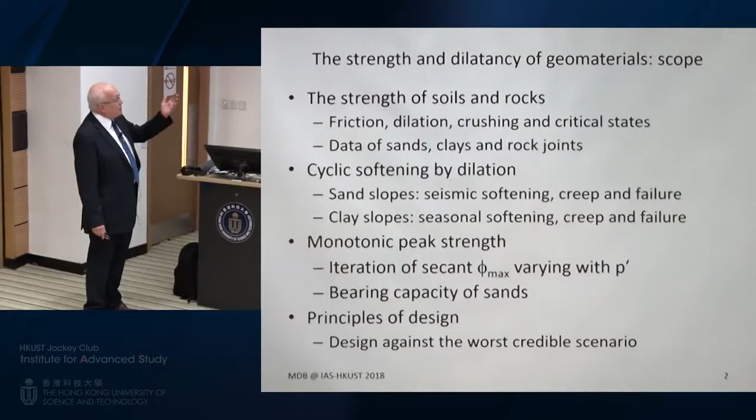I'm going to remind you that the typical code approach of defining an ultimate limit state as a once-only event has its flaws, and that's the bullet point on cyclic softening by dilation. I've only got an hour and a bit, so I haven't got time to show you anything on clay slopes, but you can ask me about that at the end if you wish.

I'm going to emphasize some points on decision-making with respect to classes of problems that either are vulnerable to cyclic softening or not. And then I've got some policy issues at the end that I've called principles of design. So that's where we're going.

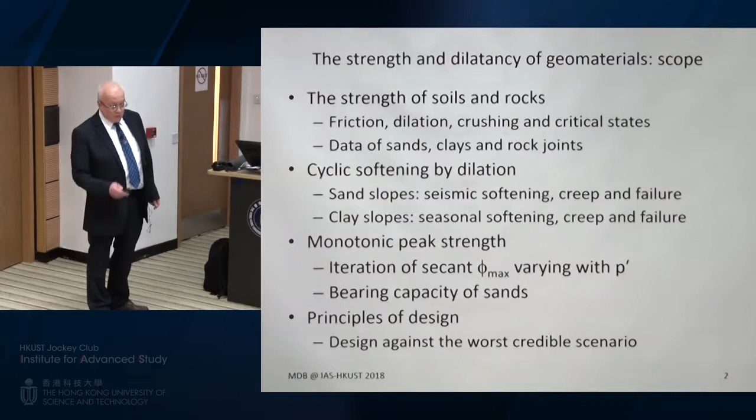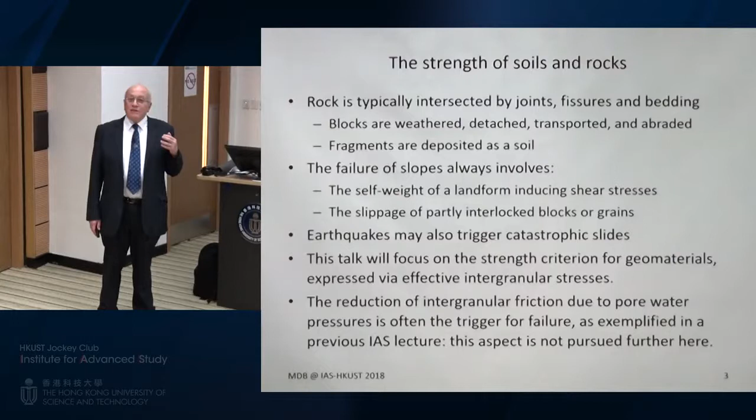IAS lectures used to invite people from any field, but as I look round the room I feel I probably know almost everybody. Are there any fugitive physicists or mechanical engineers, chemical engineers? No. I put this slide in case there were, because when I gave my first IAS lecture, there were only a sprinkling of civil engineers, and a lot of multicultural mechanical engineers trying to learn something.

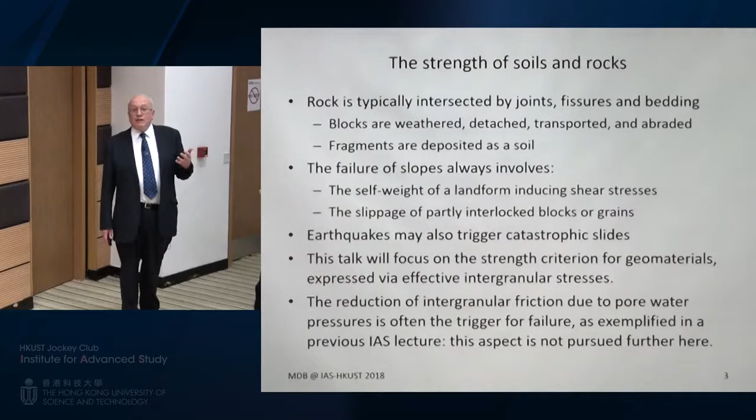So you know where soil comes from, and it's all to do with slippage either of grains or blocks, for example the failure of slopes under dead weight. In addition you've got earthquakes, and certainly pore pressures, which I'm not going to spend any time talking about. This isn't a lecture specifically on slopes, otherwise I don't think I'd get away with not mentioning the hydrogeology, the water flow that kills slopes almost without exception.

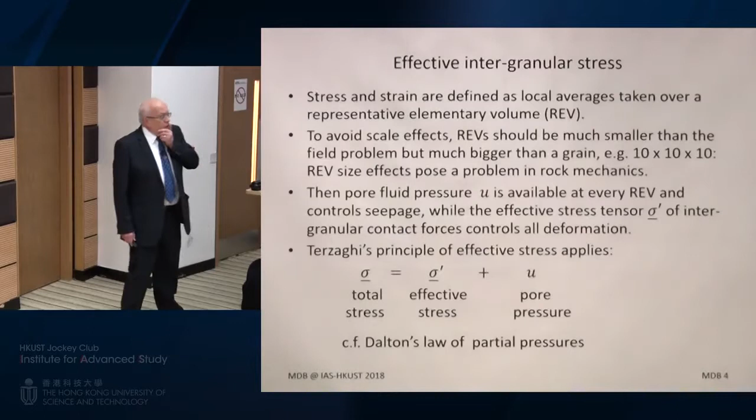So most of what you're going to get is the bullet point that warns you about it. You guys also know about effective stress.

I point out right at the top there that soil isn't a continuum. You need a representative elementary volume. I always think that if you were doing sugar mechanics, you shouldn't be thinking about a single grain of sugar. You should be thinking about an agglomeration of crystals about the size of a sugar cube, maybe 10 by 10 by 10, 1,000 grains. That might be statistically representative, that you've got enough patterns of contacts between the grains to capture the essential behavior.

In soil mechanics, we assume that's not a problem, that we can imagine a point being a sand cube, like a sugar cube, and even the sugar cube is much smaller than the boundary value problem we're trying to get an insight on. So we don't have to think very hard about it.

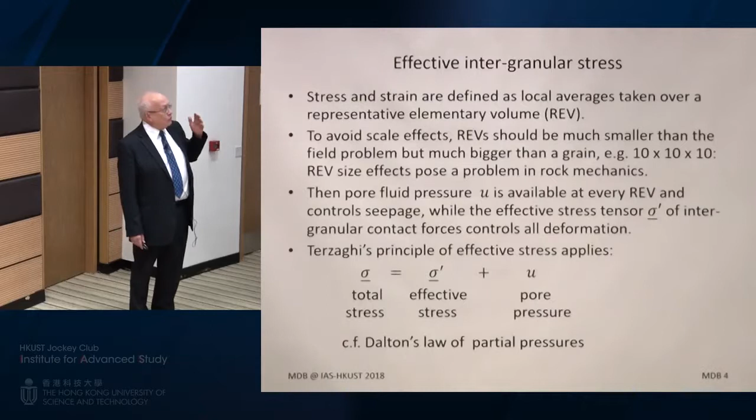They have to think in rock mechanics much more carefully about the meaning of stress and the magnitude of stress, because they're the wrong side of the REV argument. It's by no means clear what the scale effects are. And if anyone's interested in that, you can ask me a question on that at the end, because I'm not going to say any more about it otherwise, I don't think.

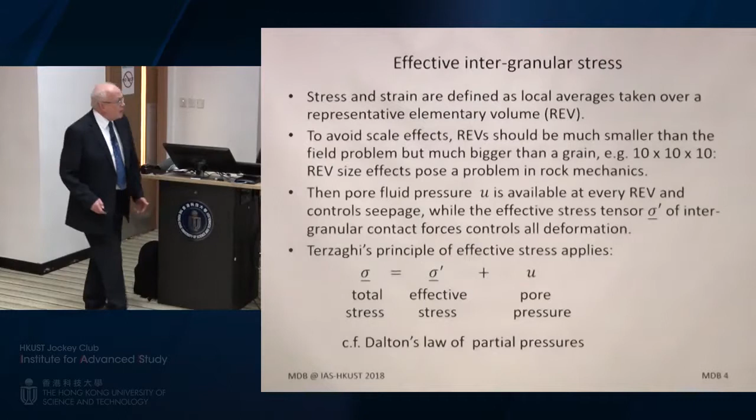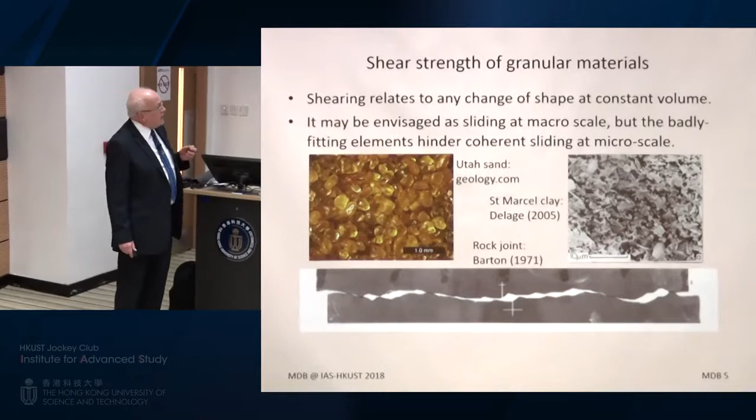And then rock joints, of course, this is taken out of one of Nick Barton's papers at the bottom. This is again a little bit interlocked. And this is the context of most of the lecture, the interlocking between grains and blocks.

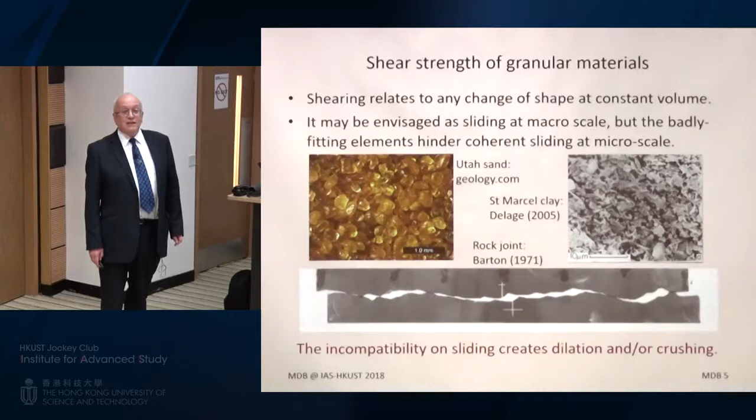So what you've got is that shear can't take place on any internal surface without creating a disturbance in the fabric, which in some instances would cause dilation, change of volume of the whole sample at its boundaries, and in other cases would just cause sort of juddering, statistically. Or crushing, which was a feature of that 1986 paper and is going to be a feature of the next slides as well.

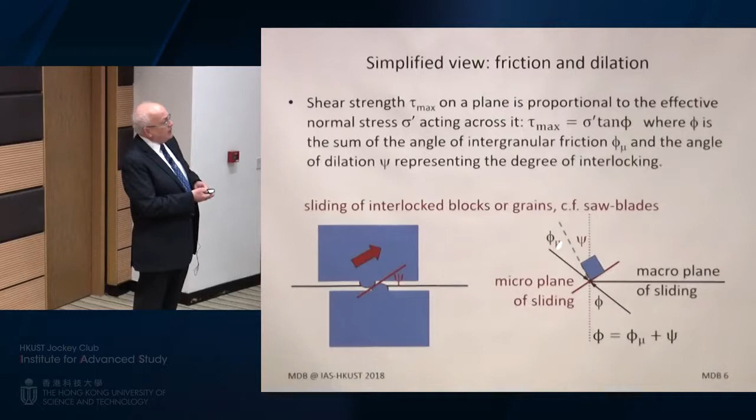This is either showing or reminding you that the interlock here with its angle psi throws out the normal to the actual plane of sliding by being psi from the vertical here, just as it was psi from the horizontal on the macro plane of sliding. And then in addition, the actual force resultant would be at an angle phi mu to that, to explain that it can slide on that red micro plane.

And then Coulomb, standing back and looking at the inclination of the force through the macro plane of sliding, would call that the angle of friction.

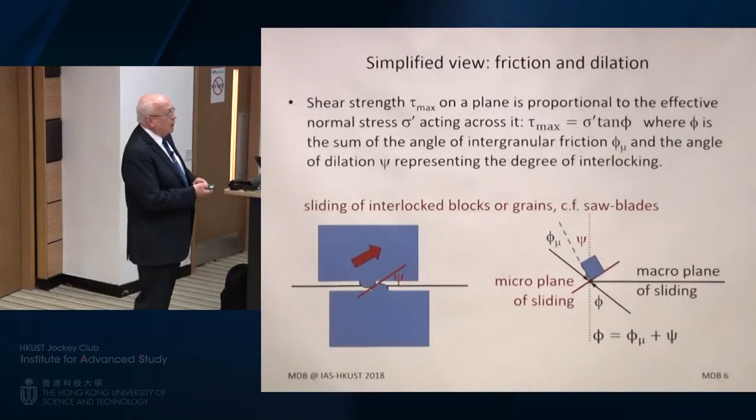Only if we get to realize that it's not really friction, that this is geometrical, it's dilation, would we hesitate to call that anymore the angle of friction. Otherwise you would be saying friction equals friction plus dilation, which might linguistically seem a bit challenging. So angle of shearing resistance would be a better thing to call it.

And that's a sort of secant phi value, if the interlocks don't crush.

Rowe had a lot of trouble with phi mu and phi crit in his own stress-dilatancy theory. And if he'd known what the latest research - and I have no reason to second-guess Senetakis, Matthew Coop, Todisco, Soils and Foundations - showing that phi mu is probably of the order of 10 degrees between smooth pieces of quartz. So when sand actually slides on sand, 10 degrees. So anything bigger than that, you need to explain what's going on.

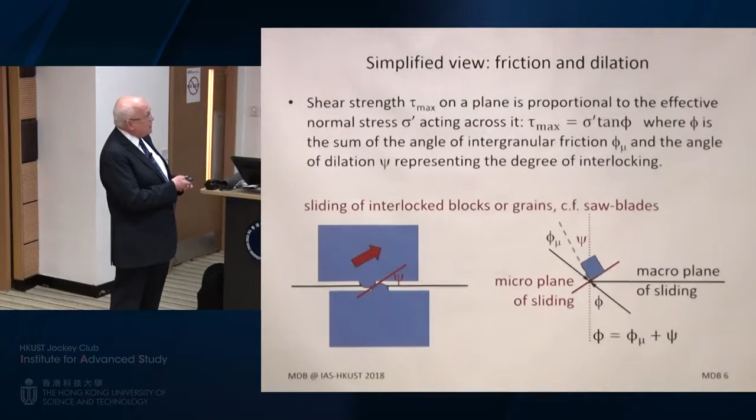And so what's particularly demanding is consider phi crit. Let me look back for you at the definition of phi mu. That was a single crystal or a single element sliding against another element.

Now, phi crit is the angle of friction you measure, for example, in a direct shear apparatus, when an upper box of sand grains slides over a lower box. So in this case, statistically, the grains are going up and down. And it's a much larger number.

So even when dilatancy is zero, you've got this critical state phi that might be 32 degrees for smooth quartz sand, rounded grains of a given size. It would be higher if there was a dispersion of sand sizes, but they were still sort of smooth, sub-rounded, but much larger if you had dispersed sizes and angular fragments.

And that's just the critical state bit. 40, 36, 32 plus 10. And that's why Kenichi didn't like the earlier slide. I mean, he can come back at me at the end, because there's obviously something else going on. I'm not talking about dilatancy here, I'm talking about the critical state angle.

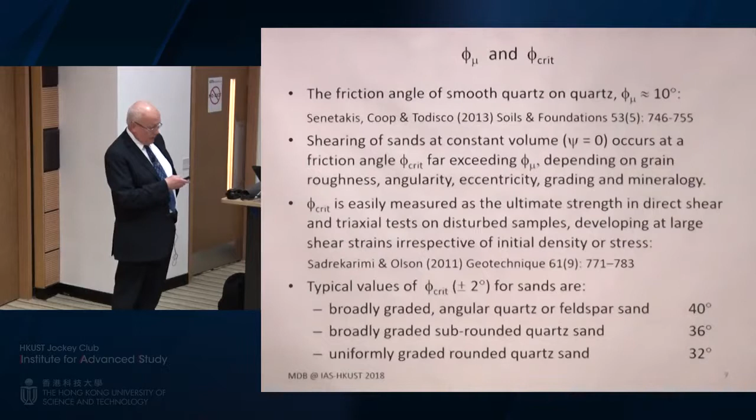So, can we get anywhere on what is the physical basis of phi crit? And if we can, does it matter? So I'm restating the problem.

Everyone finds that they've got to write phi equals phi crit plus psi. So if there's no dilation, the box of sand isn't changing in volume when you shear it, and that's the definition of a critical state. So you feel impelled to write critical state phi. And it's those bigger angles that I was talking about. So what's the explanation for such a big angle if quartz has this small angle of friction?

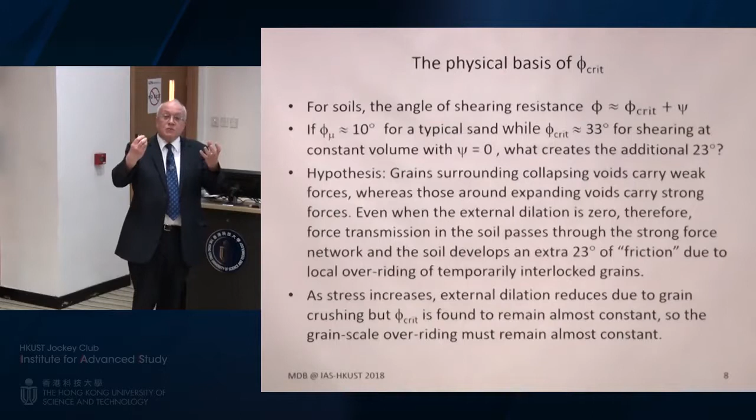So it's hard to summarize, but I've tried in one bullet point, because it's all the space I've got. Maybe it's the statistical nature of the contacts and the way they're organized. So what I chose to put here is that grains surrounding collapsing voids, you're at a critical state. Some voids will be getting bigger, some will be getting smaller. Some contacts are sort of collapsing, some are jamming and are persistent.

And the thought is that the ones that are jamming and persistent carry large forces, and the ones that are collapsing don't carry any forces at all. So it's very undemocratic. So even though volume is constant, the soil behaves mechanically as though it's sort of internally dilating, even though you can't see anything at the boundaries. That's what I've chosen to say.

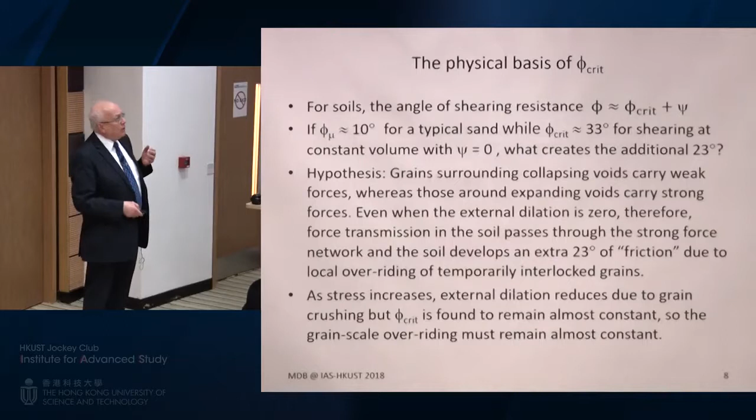It's not quite enough. It's still a sort of active research topic with people doing micromechanics, looking at contact force distributions. And so it's a sort of jamming, even in soil at a critical state, which explains the extra friction that caused such a lot of trouble to Peter Rowe in the 1950s and 1960s.

And the next part of the story is, as stress increases, even if you had some external dilation, that then reduces due to crushing. That was the proposition I put in that 1986 paper. And there's a lot more evidence now in favour of it. And so I need to say something about crushing.

This is the standard undergraduate lecture slide on phi against shear deformation. As you mobilize some shear, expressed as a stress ratio written as an angle of shearing resistance in degrees, you may find dense soil is like the green line that reaches a peak secant phi value and then drops off, whereas loose soil would painfully climb with a lot of shear strain to the same phi value. Phi crit is a material property.

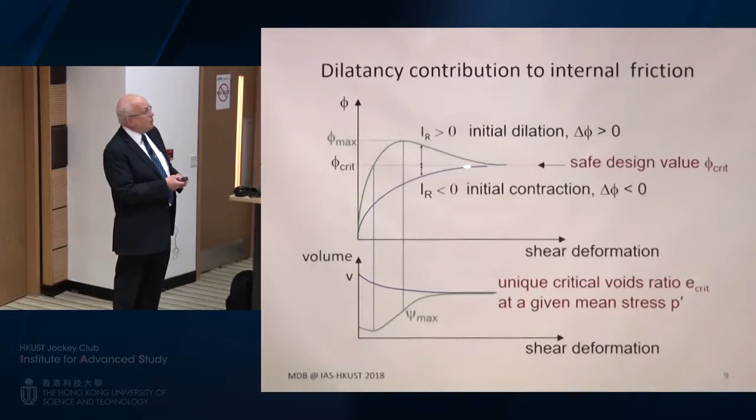So, strength and dilatancy of sands. I'm going to go through this a little more quickly. This is from my 1986 paper, data of 17 sands - it was all I could find at the time. I thought when I retired I would have a lot more time to look back at the 2,500 citations this paper has got and collect together all the other sand data people have generated since 1986, but I haven't had time to do that.

As far as I know, people are saying it's a good basis for understanding all sands, or silts, as long as they're inorganic. Looking at the influence of dilation on peak strength, and variability of dilation with effective stress, the influence of relative density and grain crushing on dilatancy becomes important. The critical state line, which was an aspect I didn't emphasize in the 1986 paper but can now, so I will, and the non-linear envelope of peak strength, therefore dispensing with the Mohr-Coulomb equation in its linear form. That's where we're going.

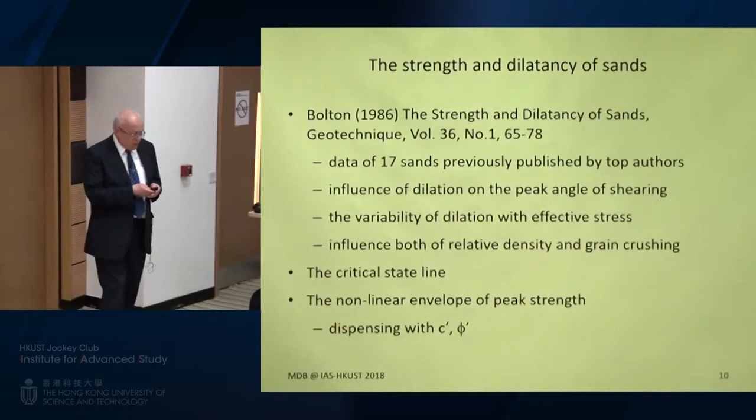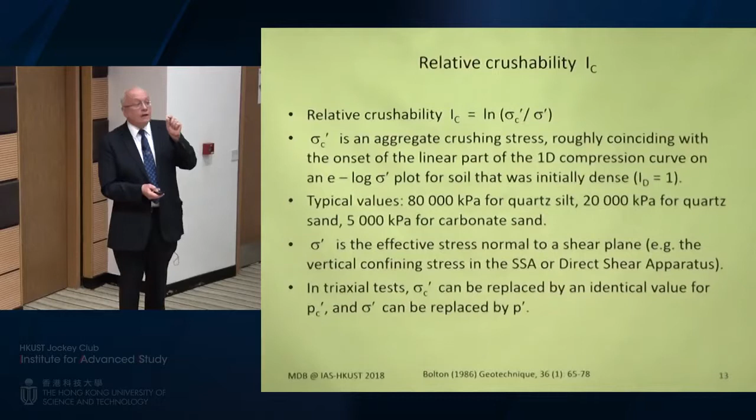Large grains are weaker in proportion than small grains. We know this with regard to rods and fibres because glass fibres and carbon fibres are much stronger because the flaws in them that would give rise to brittle fracture are obviously much smaller, and so their brittle strength is greater. And so for quartz silt, as you'll see later, a much bigger value, 80 megapascals, turns out to be appropriate.

And much less for broken shell fragments. And so this is my apologia about using sigma dash as the vertical effective stress in a shear box, and sigma dash C similarly as the parameter that goes with it, which is the crushing stress.

And so the relative dilatancy index, and this was me pulling together a database and trying to find any common sense in it. You have to have the density index and the stress index multiplied together and then maybe a minus 1. That's what I plumped for.

And then I discovered that dilatancy and the brittle strength component, phi max minus phi crit, everything was proportional to IR defined in this way.

So if the relative dilatancy index was negative, it indicated a tendency to compact, so that shearing caused the density to increase, and you end up ultimately at a critical state. And if IR is positive, that indicated dilation, so it softens and ultimately reaches the same critical state. And IR equals 0 implies you're at a critical state.

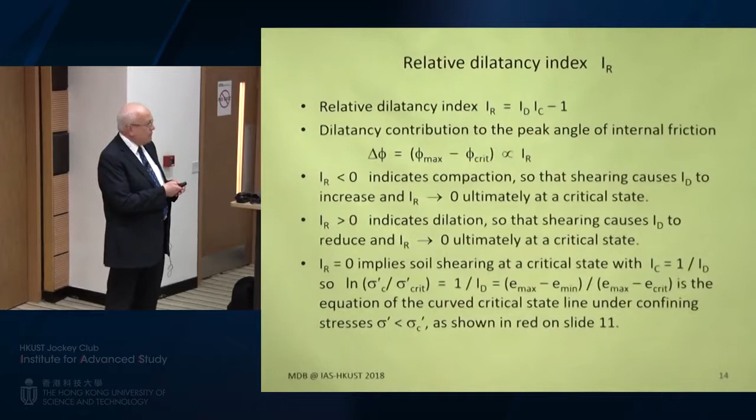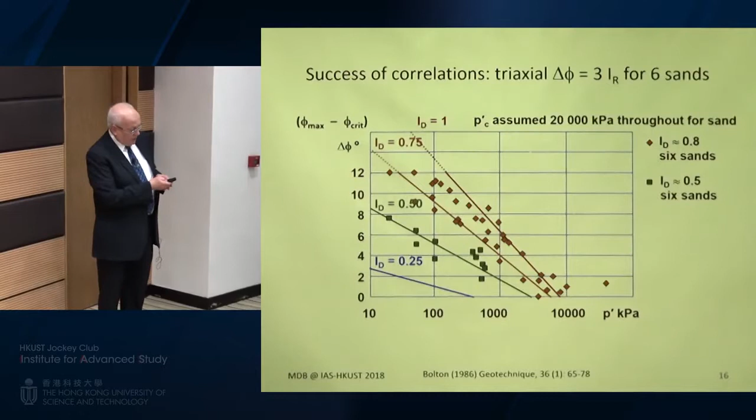That's well known to all of you. The data of the sands fitted, so 6 sands in the literature with a relative density of 80%, fitted between these lines, which are the correlations I've just shown you. This is a plot of the dilatancy contribution, delta phi, phi max minus phi crit, against log p dashed. If you look back at the basic equation, these are straight lines. These are the predictions, the data for 50% and 80% within a couple of degrees. So that's okay, or seemed okay.

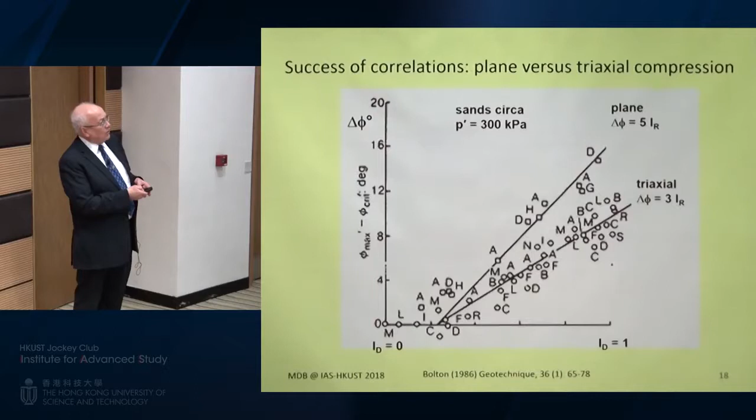This was Berlin sand, where there was data of various mean effective stresses. These were nice constant P' tests, so you could actually plot a decent diagram. This is delta phi, the dilatant bit, against relative density. These straight lines are the simple correlations, and the data obligingly fitted within a degree, actually, in that case, I think.

So where are we with soil mechanics? What does this show us? If somebody comes along in a consultancy office and says, I've found a single shear box test on this material, and there is its plot on tau sigma dashed axes, what can I say? Probably the critical state line wouldn't be here. Phi crit is so incredibly cheap and easy to find, and so that's part of the message, that we ought to do that on any granular material.

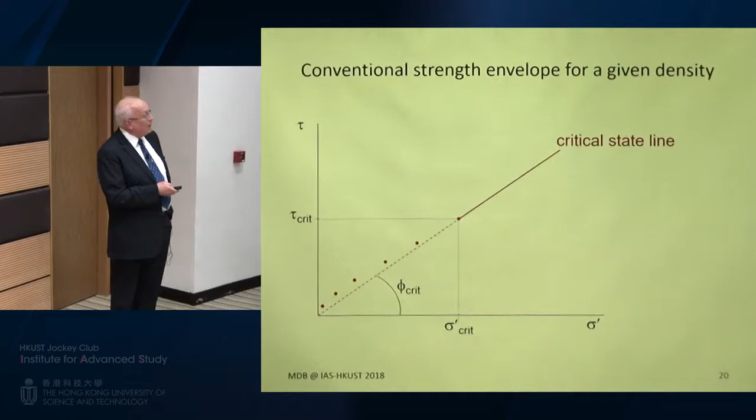Suppose they overindulge themselves and do many tests. I remember what I wanted to point out. Of course, what's going on is that as the stress reduces, there is more dilatancy, but not as much as a linear envelope would suggest.

And anyone who's played around with this knows that in slope stability problems, a little bit of true cohesion transforms the safety situation out of all recognition. It's also true in shallow foundations, by the way. So it may look on this diagram as though there isn't a huge issue, but that can have the most significant consequences.

So that's the sort of thing that goes on at the moment. And then, of course, at high stresses, any given line would fall below the critical state line and give you an underestimate. I think that is a fair statement of the conventional state of affairs.

So C' is the true cohesion intercept. It is a silly name because we know dry sand is cohesionless, and indeed it is true, at the origin there is no intercept. And there's a better characterization, which is the one I've just given you.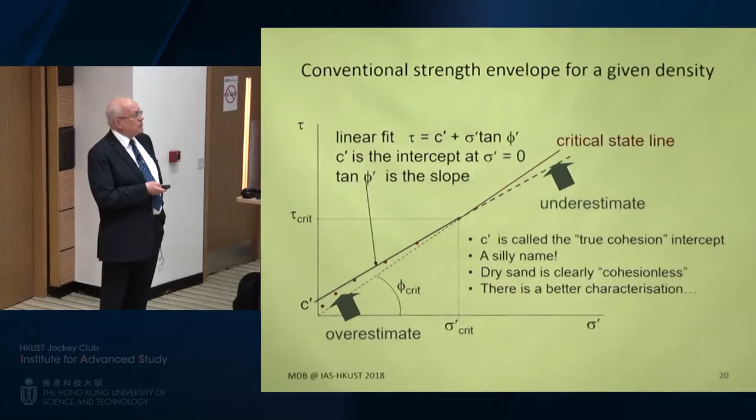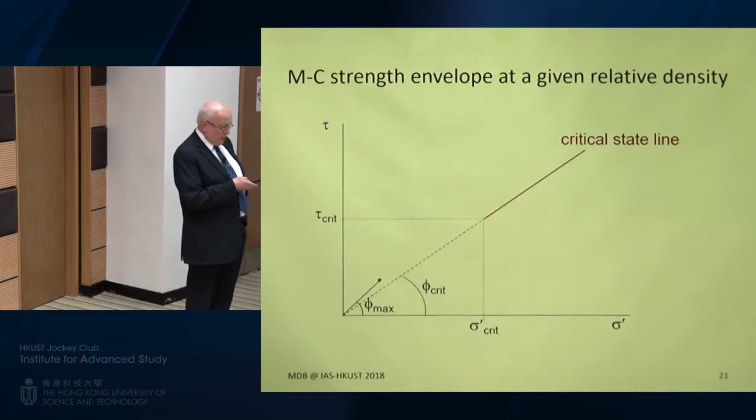So start again. This is a new world that we've woken up to, in which people do measure the critical state angle of friction, because it is the cheapest thing you can possibly measure. So they know that, and then the graduate comes along and says, I've got this one test other than the critical state, what can I tell from that? Well, what it's given you is phi max. So what can you tell from that? Well, a lot, because you substitute phi max and phi crit into our equation.

If you believe Bolton 1986 and you know you're testing a quartz sand, you might trust your luck that you know sigma dash C is 20 megapascals. You shouldn't trust Bolton 86 in that respect, of course, you should do more tests and determine it. But if that was 20 megapascals, you could have predicted what phi max was. But now you know phi max, and if you know phi crit, you don't have to trust Bolton 1986, because this is an equation that tells you what the local estimate of sigma dash C is. I'm assuming you know what density you did the test at. So you get immediately one estimate of sigma dash C. Is it anything like 20 megapascals?

And so you gain confidence. Perhaps it is 20 megapascals, and you think, oh, that's rather good. I can predict now the other nearby strengths, using the same equation to predict strength at higher or lower stresses. Because you've measured the critical state angle, you know that if you go beyond here, you don't fall below that point. You just have to do a lot of strain hardening to get to it. So very early on you gain a lot of confidence, fundamental confidence in the mechanics of what's going on in the soil.

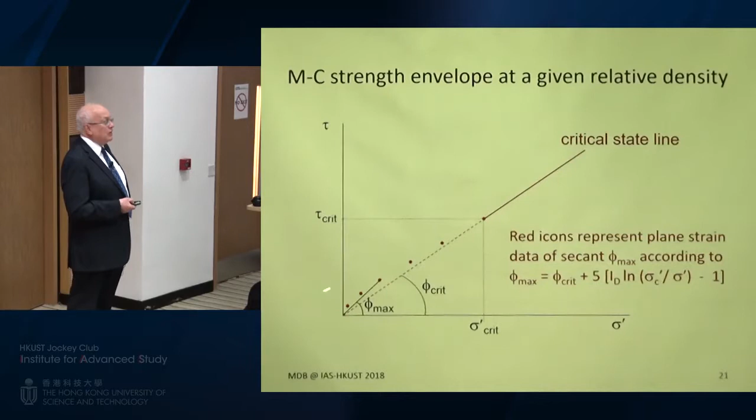Having plotted either your data or using my correlation in the database, you might think that was a bit of a rigmarole going through the secant phi thing. Perhaps I'd like to just fit a curve to that peak strength data. Let me remind you, this comes from real data from highly respected sources. It cuts out below about 30 kPa because people often don't do tests there, so we don't usually have data. I've rarely seen anything below 30 kilopascals. But with that caveat, using this equation, creating the data points and then curve fitting, the data fits a power curve.

So tau max over tau crit equals sigma dashed over sigma dash crit to some power beta, which is quite close to being 1 minus 0.14 times the relative density in plane strain. That's sort of interesting - maybe we shouldn't have been plotting tau against sigma and having linear Mohr-Coulomb envelopes. Maybe we should have been plotting log tau against log sigma and then getting linear envelopes, which is what you get from a power curve.

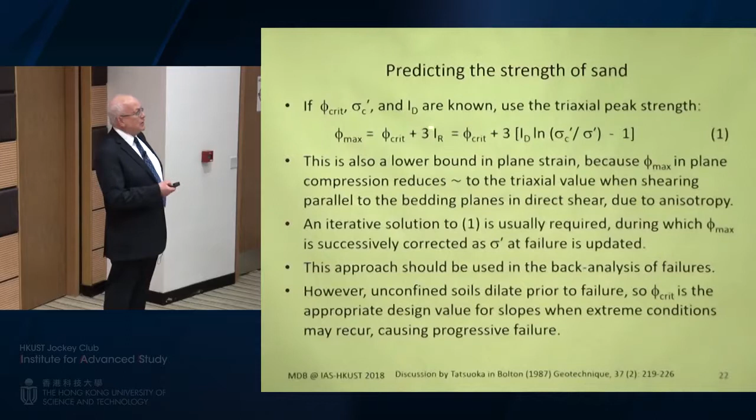So that's how you should back analyze failures. Try and find the density of the soil as it is, come up with a solution to the boundary value problem that you're worrying about that's happened, iterate on stress, get the right phi value, and then you should be able to understand what's happened.

However, as I will show you in a moment, unconfined soils dilate prior to shear, prior to failure. Before you get to peak strength, they've started dilating. And if you keep revisiting that prior to failure point, they'll keep dilating, causing progressive failure. And that's important.

Clays. How am I doing? Oh, frightening. 5:57. Got nowhere.

Clays consist not so much of platelets, but of booklets or chains of particles interlocked in the way I've described. Clay mud is compressed, and these things break, crush effectively, delaminate and break up.

And so clay quickly finds its normal or plastic or clastic compression line, whereas at sand we had to go all the way to 20 megapascals. If we let the clay off and reduce the stress by the yield stress ratio, or more usually the over-consolidation ratio, then on that unloading, reloading cycle, it's quasi-elastic.

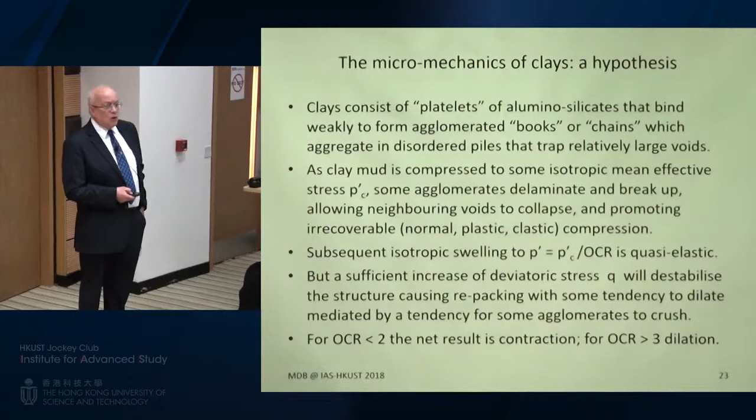And as OCR increases to a large number, you're further and further away from the agglomerate of particles initially crushing. So you've got to push it further before it breaks. And as we all know, for small overconsolidation ratios less than 2, the net result is contraction. For overconsolidation ratios greater than 3, it's dilation. So there are these two opposing tendencies: destabilization and repacking at small OCRs, and the tendency to dilate at high OCRs.

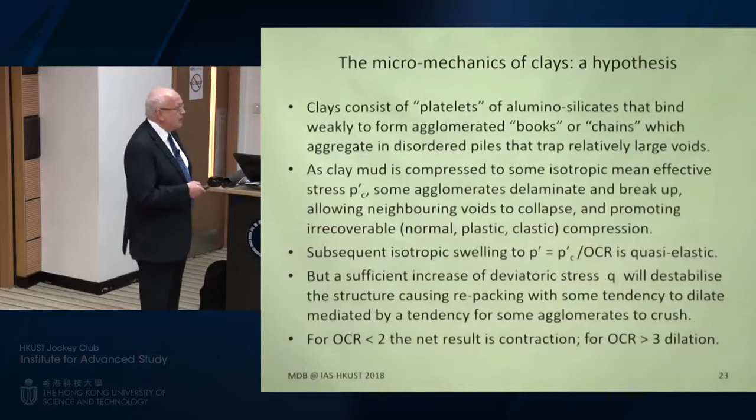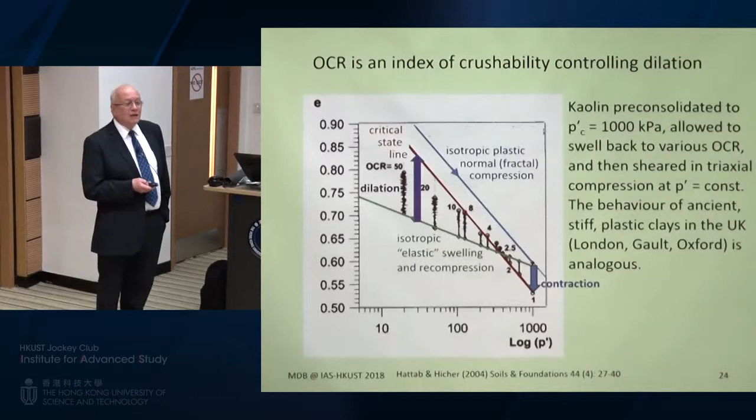And that's sort of hypothetical. You can't see what clay is doing. You can see sand breaking and damaging, but we haven't got the killer experiment yet that shows blocks, groups of clay particles breaking up at different stress levels and dilating. It'd be a nice thing to see.

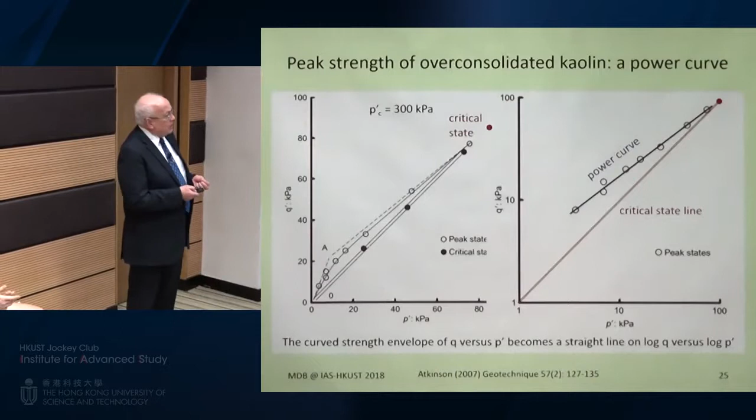This is clays. So this is the peak strength, and if you push it over the peak, it softens down onto the critical state line. I think that's all I had time for on clays. Well, I sort of summarized.

Okay, so Atkinson 2007 normalized against P dash at the critical state at each new voids ratio. Well, that's a little bit clunky for what I wanted to do, so I renormalized it against P dash crit on the same elastic unloading line. And then I get very much the same equation that I showed you with the sand, and so I gave that an index beta as well.

And in this case, there really was some variation from clay to clay. Because in the sand, you had no idea what the probability of fracture of the different grains was—they'd never been to such high stress before. In the clays, everything's been taken up to a high stress because we're dealing with over-consolidation ratio. So it's actually a different stress history condition than was the case in testing sands.

We don't often think of testing sands through an over-consolidation cycle. I think we probably should, but we don't. And so it shouldn't be a surprise that the propensity of different clays to damage in different respects, and therefore give you peak strength curves, power curves with different exponents, might well be perfectly sensible.

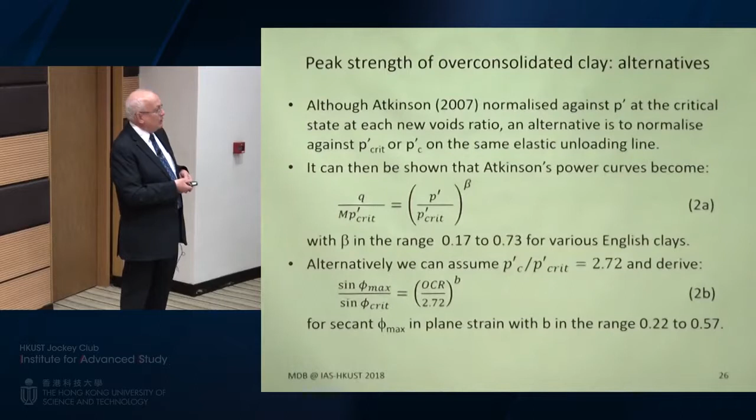So depending on the geometry of the fabric of the clay, the particular clay, you would expect different beta values. And I found that you could also express it in terms of a ratio of sine phi max over sine phi crit. So there are these other expressions, any of which you can rely on, but sands and clays being really very similar in the data, and hypothetically at least, very similar in the reason for the data being very similar.

Just a comment about ultimate strength of clays. Lupini, Skinner and Vaughan explained that you could get clays into a critical state if they were engaging in turbulent shear, and then you might have an angle of friction of typical clays of about 20, 21 degrees.

But as we know, sliding on a polished slip surface, which for some reason we speak Swedish when we talk about polished slip surfaces, call them slickensides, with residual friction phi res, and that's about half phi crit, maybe only of the order of 10 degrees, can be as small as 6 degrees. And it's tempting, isn't it, to call that phi mu. I mean, if you can see your face in a slickenside, then you're looking at a phi mu problem, smooth surfaces sliding against each other.

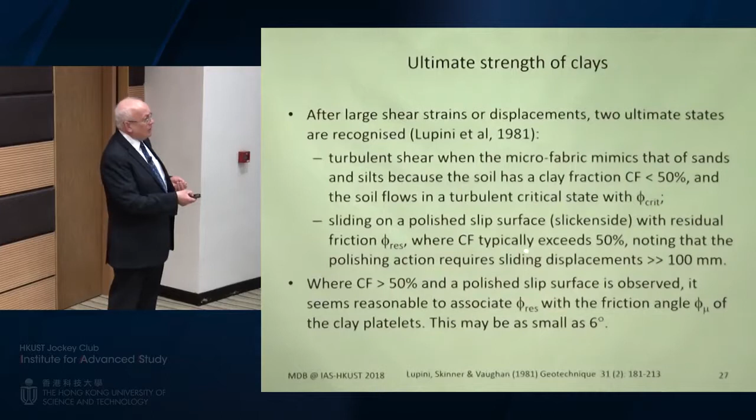So maybe the difference between phi crit and phi mu. It appeals to me anyway. Rocks. Better speed up.

Copying Nick Barton. Rocks are nearly always controlled by discontinuities, which are nearly always rough and interlocked.

Barton did exactly the same sort of thing that I did for sands. He talked about them being interlocked and the importance of waviness and roughness, and linking to dilation mediated by crushing. So he had exactly the same set of ideas.

And from the very earliest days, I know I've quoted his 2013 paper, but there's a 1985 paper and earlier papers than that, when he was talking about the complete uselessness of the Mohr-Coulomb strength envelope for rocks, for joints in rocks.

And so in 2013, he did that sketch where he wanted to say, in megapascals tau versus sigma dashed. Intact rock might be up here, and if you were very lucky with a sort of Hoek-Brown criterion, you might measure some intercept. It might give you a real tensile strength and a real shear strength at zero effective stress. But all other materials, he was talking about rocks, fractured rock, jointed rock, rock fill, non-linear strength envelopes.

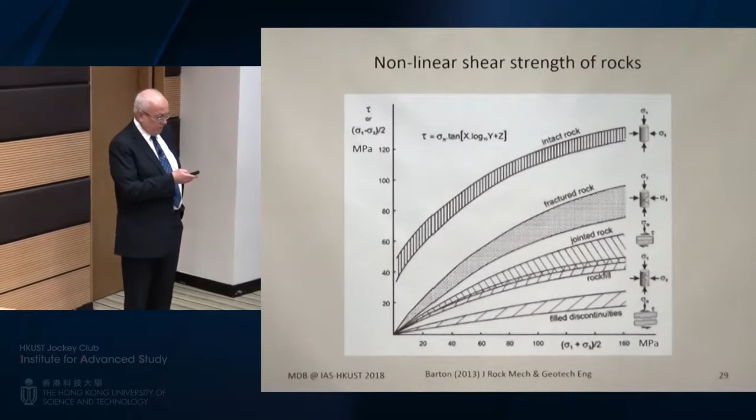And so that strain of work didn't begin with Rowe's stress-dilatancy. It began with Patton, but coming up with exactly the equation I began the sands lecture with, phi mu plus i. That's the notion of microplanes and macroplanes that I introduced. And phi mu is the material friction angle.

And then Barton came along in 1977 and said, no, it's not phi mu, it's phi crit. And you can find it by just testing the rock joints until you get a steady, sort of steady value, but there'll be a juddering. So it will have stopped dilating, but it's noisy.

And so he wrote phi r. Unfortunately, in each silo of thinking, even rock mechanics and soil mechanics people can't agree on using the same symbols for things. It's sort of a pity. So he calls it the residual friction angle. I was obviously calling it critical state angle.

And he immediately linked to an index comprising a joint roughness coefficient multiplied by the logarithm of the ratio initially between the unconfined compression strength of the asperities on the rock crack divided by the current normal effective stress. So that is effectively identical to what fitted sand.

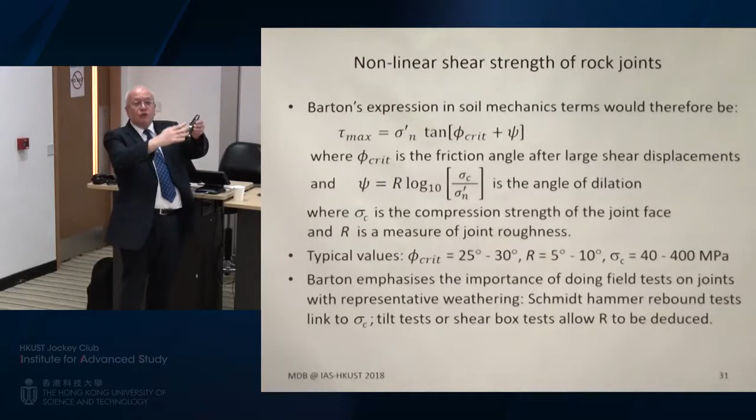And where Barton was particularly good was they emphasized the importance of doing field tests on joints. So you find a joint and you want to discover what all this is about, and he would get you doing little tests, sliding an upper and lower part of a rock joint over each other. So you tilt until it slides, and then you back analyze and find R, or you do a shear box type test and back analyze and find R. And you get the sigma C.

He emphasized the importance in rock mechanics terms of getting to know the sigma C value for the actual weathered asperities. In a broken piece of rock, you get water and oxygen available and it weathers over a period of time. And so he recommended using a Schmidt hammer to do rebound tests calibrated against the unconfined compression strength of rock so that you actually get the proper weathered value. And so he's had 30 or 40 years experience validating this identical approach that worked for sands and clays in rocks.

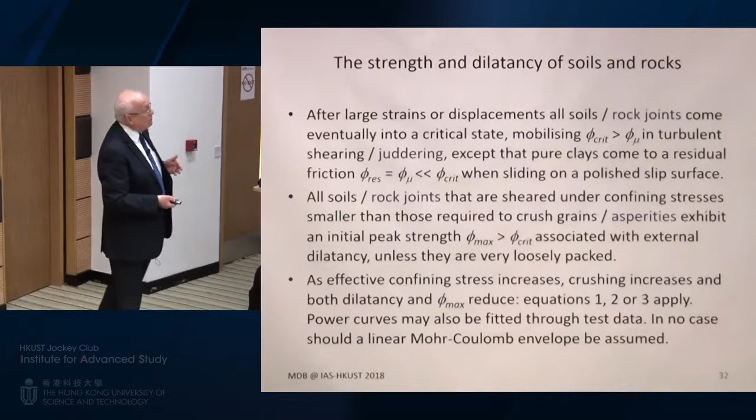So strength and dilatancy of granular geomaterials is all of a piece. At large displacements, large strains, phi crit is greater than phi mu, except for polished slip surfaces where you get what we call a residual phi, which is probably the same thing as phi mu, which is much less than phi crit because of the interlocking, juddery nature, the internal strong force network being undemocratic in how it distributes stresses inside the granular material.

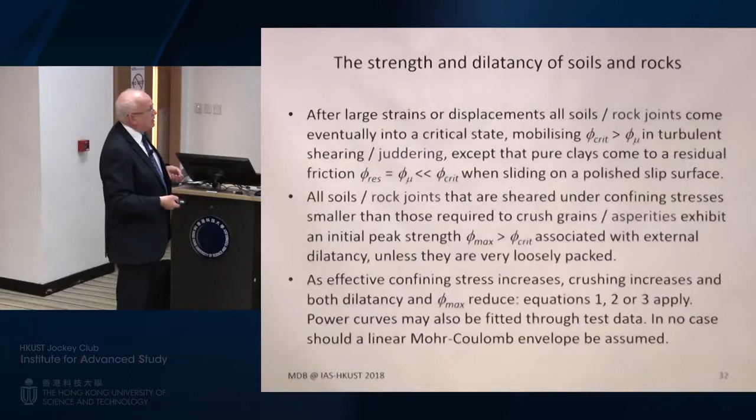All soils and rock joints sheared under confining stresses smaller than those required to crush grains or asperities exhibit an initial peak phi max greater than phi crit associated with dilatancy, unless they're very loosely packed. As effective confining stress increases, crushing increases, and both dilatancy and phi max reduce, and those equations for sands, clays, and rocks that I introduced apply. Depending what the material is, you've just got to slightly change the definitions in order to link in with the data sets that have been published.

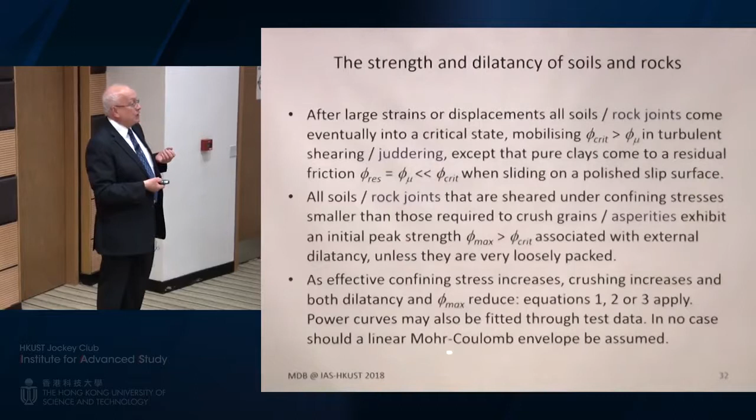But the same ideas work in every case, and in no case should a linear Mohr-Coulomb envelope be assumed.

So this is what I've been building up to. This is C.K. Lau's PhD from Cambridge that was eventually published in 2011. C.K. not only did all the work doing the tests, and as you'll see in a moment, doing the analysis, but he had to do all the work writing it up, and then dealing, as ever, with the negative reviews from Geotechnique. A few years later, somehow getting the nervous energy back to deal with those negative reviews. Of course, it was all then reviewed fresh, and he did just a splendid job on all those things.

So there's a numerical analysis of the vertical bearing capacity on sand, and the experimental evidence of 1G and high-G tests on this problem. These are circular foundations on sand, some dry, some submerged. What we chose to do was place the evidence in the context of what every engineer thinks they know, which is Nc, Nq, and N gamma.

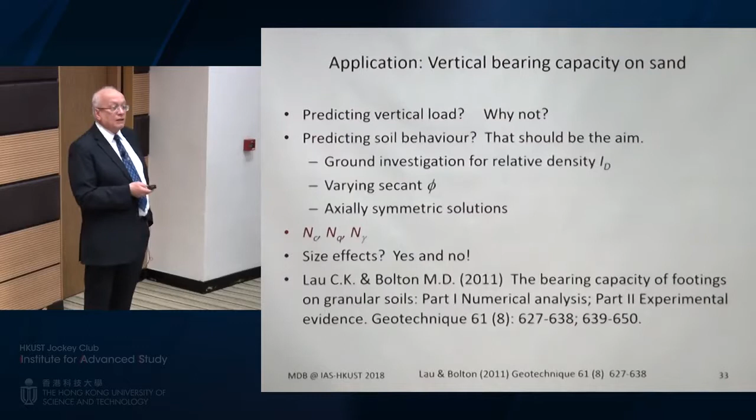And then there's the awful problem of size effects, and I'm going to say a word about that. That's really where the PhD project started.

He did his own triaxial tests at a very broad range of stresses. There's the sand on the left and the silt on the right. If you compare, for example, 50 degrees of angle of friction, you'll see that the silt is a little bit stronger than the sand.

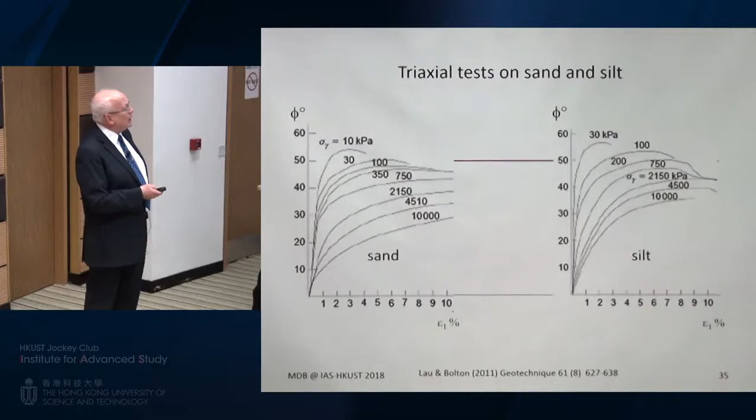Does that mean we've gone wrong somewhere? Well, no, it's inevitable, because silt is stronger than sand, and so it's more dilatant, as you can see at every point. It's intriguing that engineers always think that silts are weaker than sands.

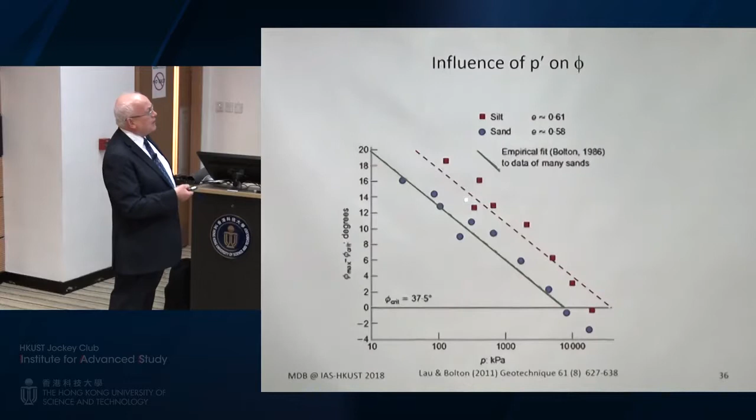And we believed that the critical state angle of both the sand and the silt was about the same, at 37.5 degrees, from that triaxial data I showed you. So he then went on to do model tests of silt and sand, geometrically similar, at a similar void ratio, very dense actually—bearing in mind it's angular, this is pretty well as dense as you can make it in each case.

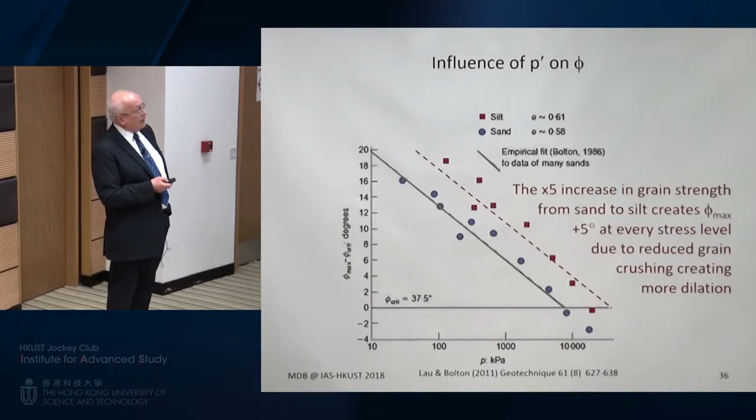So, as I was saying, you could either regard the silt as 5 degrees stronger or as 5 times stronger. If you look at the horizontal axis, you've got to multiply p dashed by 5 to get the same result. If you look at the vertical axis, you've got to add 5 degrees. So it's the same relationship between strength and dilatancy, and you can express it either way.

This is the equation we introduced half an hour ago, the nonlinear peak strength envelope. We've now established PC values for the two materials: quartz sand, as ever, 20 megapascals; quartz silt, 100 megapascals. If you differentiate this, what you get is d phi by dp dashed is minus the delta, which is the 3 degrees, times the relative density over p dashed.

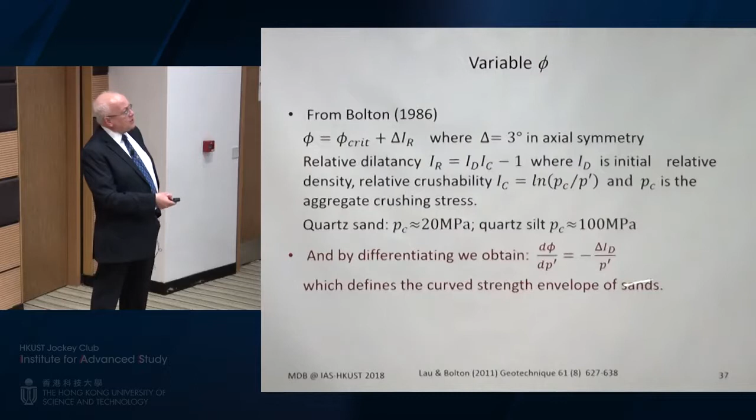So this is the equation, if you want to put it that way, of the curved strength envelope. This equation and this entire slide has been in existence and available to you for the last 32 years. It's the actual equation of the peak strength envelope of granular materials.

Isn't it a pity that we haven't been using it, since it fits all the data of sands, clays and rocks? Whereas linear, Mohr-Coulomb envelopes don't fit the data, and yet we do use it. This is why it's important.

So here is CK's slide out of the theoretical paper of an axially symmetric circular foundation. There's the center line, you're pushing down. It's a 5-meter footing, a big one, like a spud can or something. Submerged, dense sand with a critical state angle, as I've said, of 37.5 degrees, to go with the test data that I'll also show you in a second.

And under the footing, you've got an immense stress, and so you just get the critical state angle mobilized here. What he did was a nice analysis, which you can read about - it's a modified Prandtl style analysis of bearing capacity failure, circular footing.

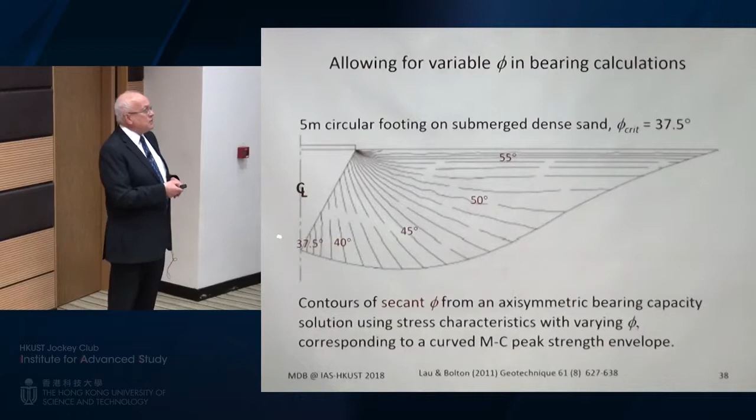And as you move out of the high stress zone, the actual secant angle that you can mobilize increases until finally, when you're on the seabed, but still in the sort of passive zone by the side of the foundation, you can mobilize an enormous angle in excess of 55 degrees. This is just an essential feature of the solution - you've got to be able to recognize that variation.

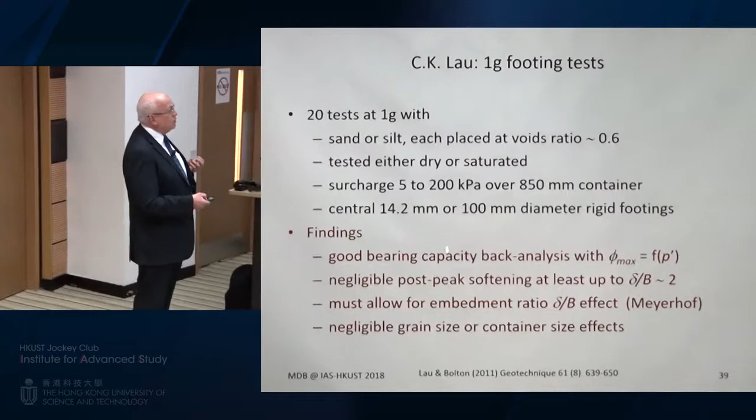The tests, a very quick summary: 20 tests at 1G for the NQ factor, dry or saturated, small or big, silt or sand. Every test quite closely fitted the Prandtl style analysis with secant phi varying, so good bearing capacity back analysis in every case.

Negligible post-peak softening, at least up to a settlement to diameter ratio of 2, so you can use the peak strength. Must allow for embedment effect, Meyerhof. No grain size or container size effects, no size effects. Stress effect: small footings, small stresses, high angles of friction, high NQ values.

Meyerhof, I bet you know where that comes from - that was 1951, so it's 3 generations of soil mechanicians ago almost. But you just allow for more rotation in the fan, in the sort of passive area, according to the geometry as Meyerhof set it out.

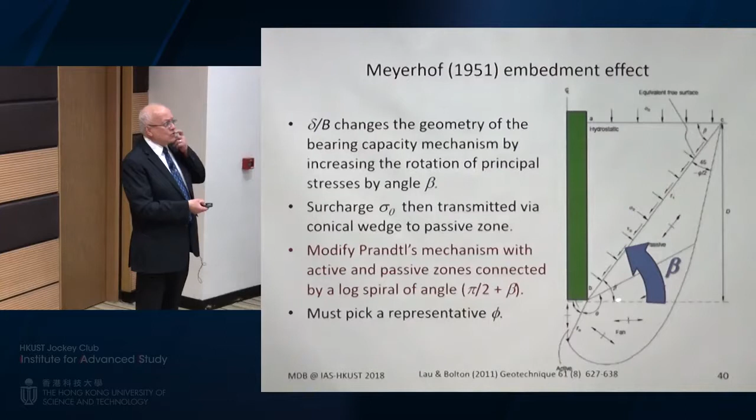And so you can read up Meyerhof's depth effect. This is a bit exaggerated, but as the footing punches in, you get this extra component of strength due to the change of geometry. So we had to account for that.

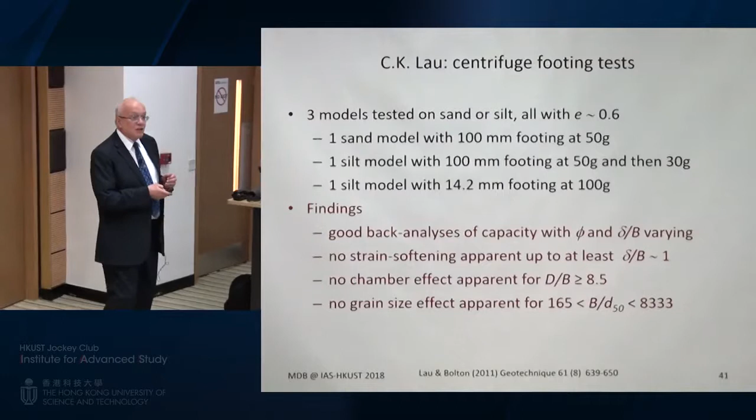If you're not sure of that, ask CK afterwards. But how very valuable to have grains in a small physical model that have the right size relation to the object that you're interested in. Silts do model sands, sands model railway ballast, so you need to just square that one away. And if you want to do more centrifuge tests on silt, I would recommend it, but you need a very good research student, very patient.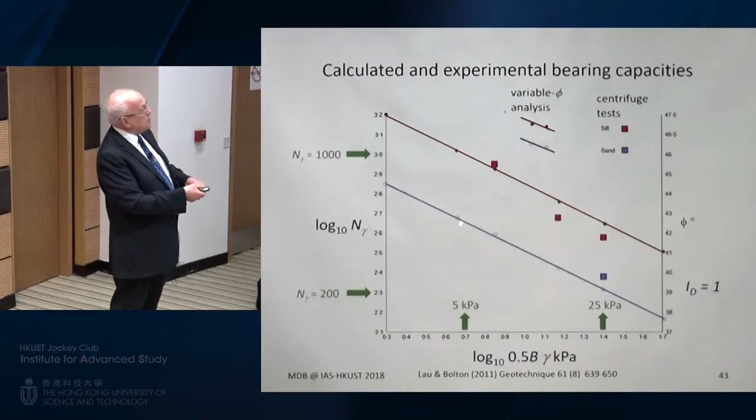If you had silt, you could have 600 or more. If you only had a 1-meter footing, then because the stresses are smaller under a 1-meter footing, if you have silt, you could have 1,000. If you have sand, you've got to be satisfied with a number not unlike 600 or 700.

So my comment about that is that an engineer using Terzaghi and Peck, or any of the thousands of textbooks that look like Terzaghi and Peck, or lecture notes, would likely make an error greater than a factor of 3 if they were trying to do it with C-phi dashed, instead of what CK used, which is the curved strength envelope, because of the terrific range of stresses in the problem.

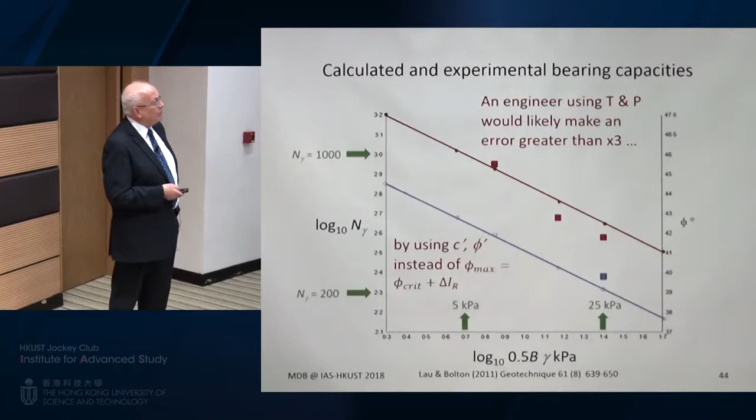So, the lesson on vertical bearing capacity of sand is variable phi, variable delta. That was the Meyerhof effect. Notwithstanding grain size or footing size, the same analytical model worked well. So you don't have to worry about it.

And it doesn't matter that silt is a bit stronger than sand, as long as you've done your own triaxial tests. Given strain softening in this problem, you're permitted to use the peak strength. So the ultimate limit state design of foundations for vertical bearing capacity, it looks as though you can use peak strength, but you must define it properly in terms of secant phi varying with stress. A linear Mohr-Coulomb description of peak strength is so crude that you're going to make factor 3 errors in all likelihood.

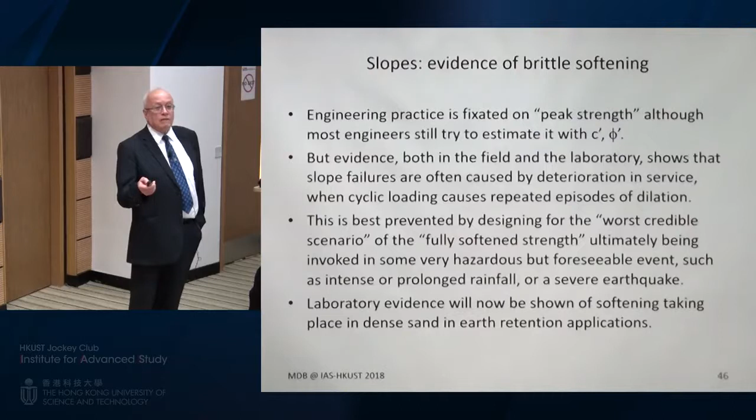Slopes: there's evidence of brittle softening either in sands or clays. Take, for example, the 1957 paper by Skempton on London clay, which showed you could only reliably mobilize phi crit, the critical state value, even though it's a very heavily over-consolidated clay.

And I've got lined up here a test on sand, and it's now 6:33. I look, I've done what I always do, which is just talk and talk and talk. 6:33, Charles. I think this was meant to finish 3 minutes ago. Not too bad.

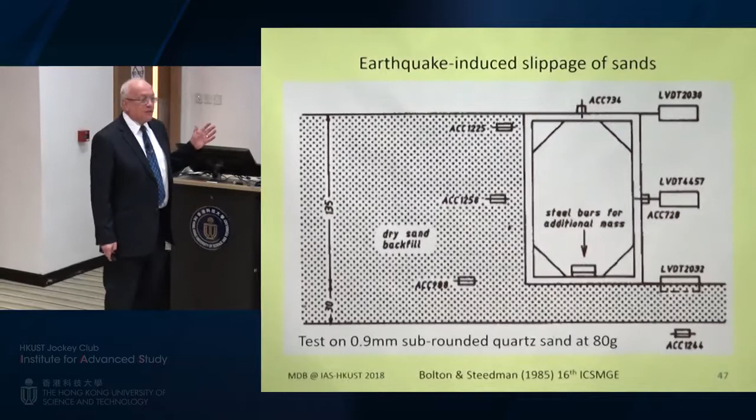Should I just shoot through and get to the conclusions? Shooting through, earthquake test by Scott Steedman, also from the 1980s.

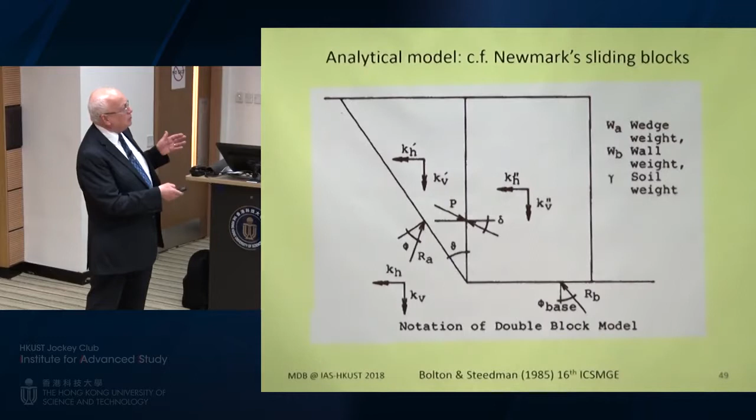A 17% earthquake. Mononobe and Okabe were quite right in a way in their analysis, at least in one respect, wedge failure behind a wall. If, as Scott Steedman did, you measure all the acceleration components, you can complete the force polygons. You can therefore begin to see the problem of how, with the earthquake input, this level down here, just as the earthquake begins to diminish, the wall movements, plotted in millimeters on this axis, just begin to increase dramatically.

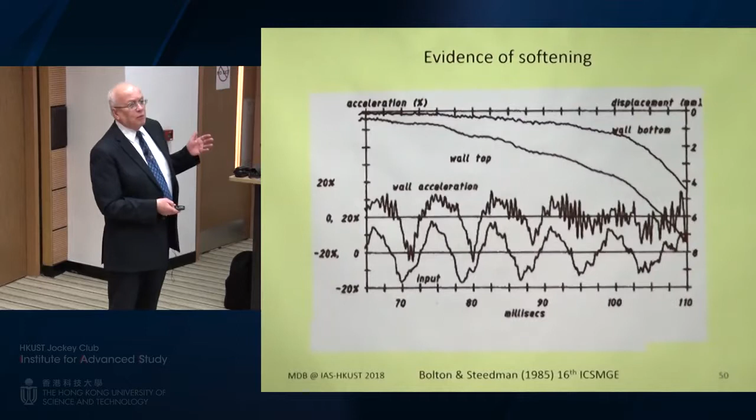So what's happening there is that the soil is softening. You can see that just in the raw data. It must be. And here's Scott's back analysis. You can mobilize the peak strength of sand, about 50 degrees, for a while, but then there's very strong rapid softening to the critical state, 33 degrees, in the middle of the earthquake.

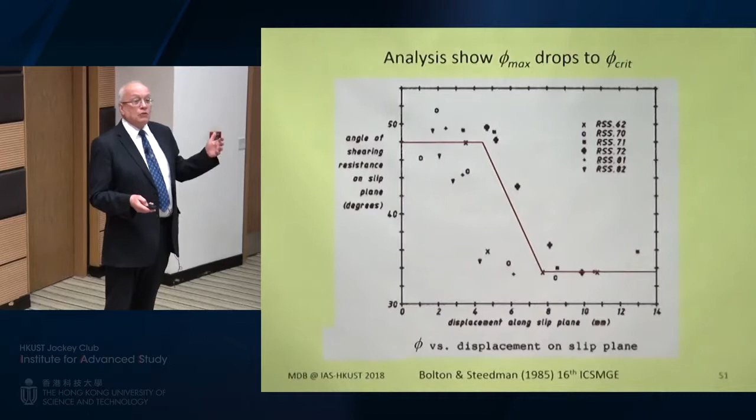A problem that is loaded recurrently, as earthquakes always are, or as slopes in the natural environment are, with their natural loading from pore pressures, especially following different rainfall events. All those things soften in situ down to a critical state, phi.

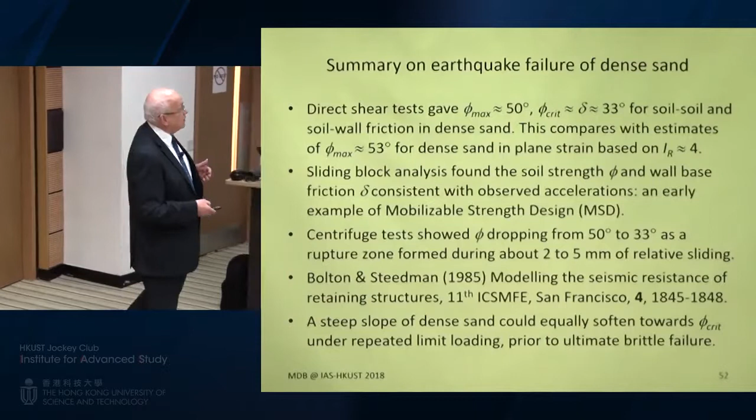So that was the summary. Cyclic loading leaves things softening to a phi crit, just like Skempton said in 1957, just as Andy Take and I published in 2011 after centrifuge tests in an environmental chamber at Cambridge with weather variations.

So, summary on the shear strength of slopes: peak strength is best described with phi max. Phi max drops to phi crit due to cyclic loading as well as due to increase of stress. Two different mechanisms.

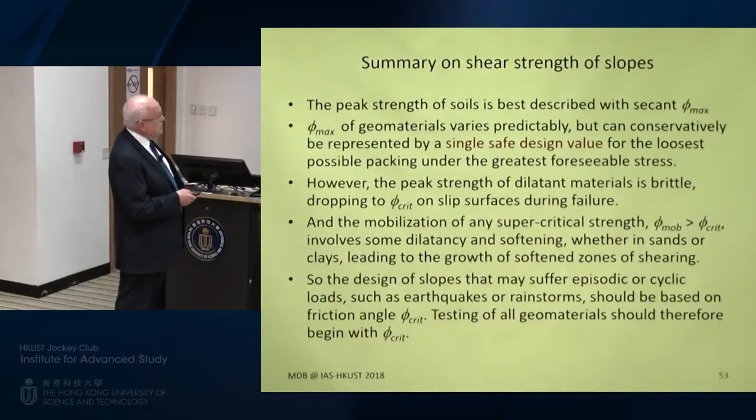Mobilization of any supercritical strength, phi mobilized greater than phi crit, involves some dilatancy and softening. And so if that keeps happening on every earthquake cycle or after every rainstorm event, bit by bit, you'll shake the soil loose, either in an earthquake or watching the deterioration of slopes in the field. And so you ought to design those sorts of things, not with the peak strength, but with the critical state strength, because that's where it ends up in the worst case.

I don't have to remind this audience of the Po Shan Road disaster, said to start with small slips, opening cracks, followed by a catastrophic landslide. So the question is, was it shaken loose by the onset of slippage, and then having broken free and softened, it roared down the hillside?

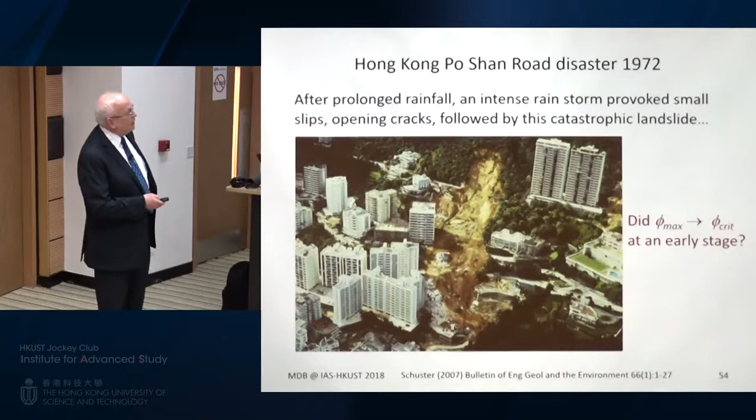The conclusion of all this is that all geomaterials are interlocked, and phi crit is bigger than the angle of friction between grains. Strength enhanced by dilation reduces due to crushing, and also reduces due to cyclic loading. Monotonic strength of things like foundations under dead load is okay, demonstrated in centrifuge tests, so you know where you are. Live loading has been shown in some boundary value problems to soften the soil progressively, dilating event by event, cycle by cycle, down to phi crit.

So what you want is to design to phi crit in the worst credible design scenario - worst rainfall event, worst earthquake, whatever. I thought I would have finished half an hour ago, but here we are. This was going to be policy pointers for discussion. It is the very last slide.

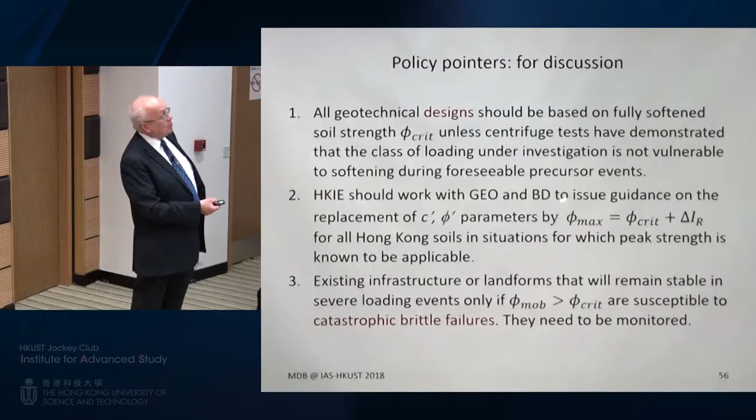All geotechnical designs should be based on phi crit, unless centrifuge tests following CK Lau and others have demonstrated that the class of loading under investigation isn't vulnerable to softening during foreseeable precursor events. Maybe HKIE should work with GEO and BD to issue guidance on the replacement of C-phi parameters with proper parameters that actually fit some data, for all Hong Kong soils - checking out what the parameters should be and how you measure them.

Existing infrastructure or landforms that will remain stable in severe loading events only if you can mobilize greater than phi crit are susceptible to catastrophic brittle failures - Po Shan Road, for example. They need to be monitored.

When engineers started making ductile steels, at that point they realized that they'd let themselves down in a sense, making cast iron suspension bridges, and started inspecting and monitoring for crack propagation in cast iron. Maybe we owe it to ourselves to take a similar approach. That was the last slide.

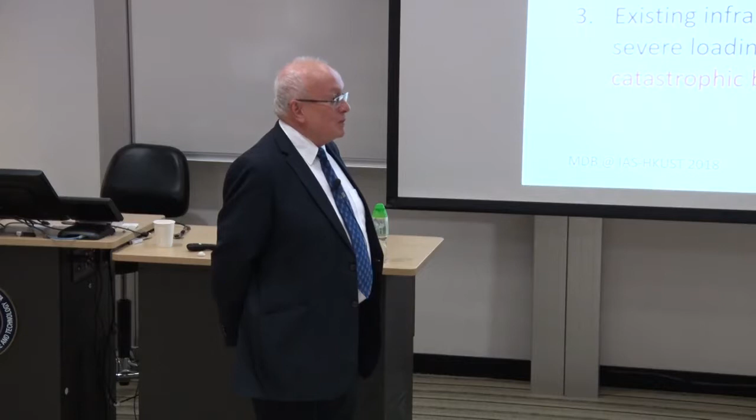Maybe with that, I think it's a nice closing for this distinguished lecture. And I do have a suggestion, since I'm the MC for tonight - it would be very nice if you come up with a unified theory for sand, clay, silt, and fractured rocks, and submit it to Proceedings of the Royal Society.

That would be a nice piece of work instead of writing a book. Yes, I think that actually tonight, in some way, you already stated a unified theory for all this material. I'd like to do that. Except the bonding, you haven't covered. It deliberately avoids that. But that's Ken's point - I think once you've got bonding, that is what you've got.

Yes, and that puts you into a different ball game. That's why I said fractured rock. Unless you take Nick Barton's point that actually it's still dominated by discontinuities, but then you have to find out. Yes, yeah, so I think that would be a very nice piece - thank you.

Thank you for the publication, and I'm sure that will be highly cited - more than 2,000 times, I'm sure. Okay, yeah, that's my humble suggestion, if you don't mind. And I'm sure you all enjoyed this very insightful presentation, from theory to data, supported by data.